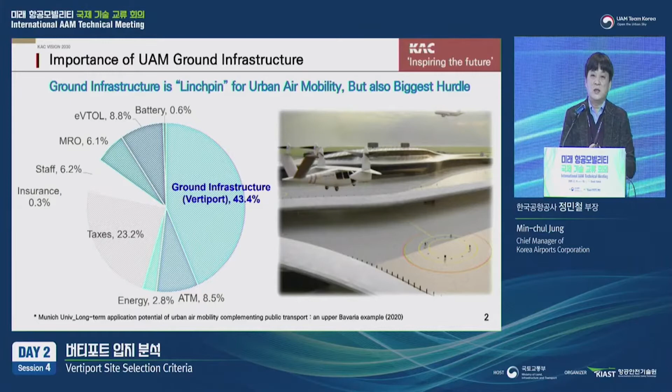This is called UAM. We believe it will be challenging to build UAM vertiports in highly populated regions. There are many factors that need to be taken into consideration, such as accessibility, obstacles, land, public acceptance, and energy.

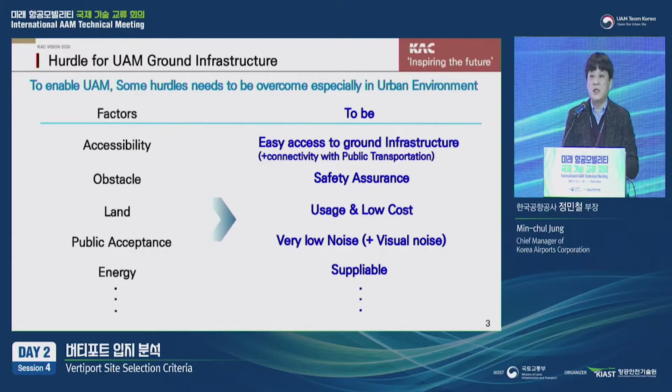As you know, we also need to consider noise factors, as well as charging facilities, because we need to have super fast charging facilities.

So where should we build these vertiports? Overseas, there are Joby Aviation and other UAM leaders. They are better positioned to build vertiports because they have large land compared to Korea.

Compared to those countries which have large land, Korea's situation is a little bit different. We face a lot more challenges to build vertiports because we are a small country with high density of population.

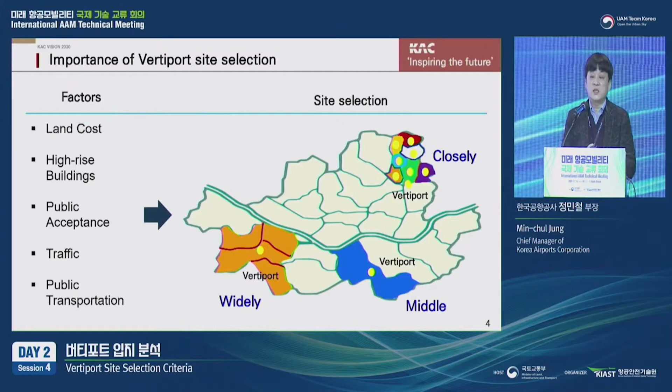A vertiport is not like a bus. There are three different ways to build vertiports. First is to build vertiports in closely related regions, such as building bus or taxi stops. Second, we can build it in more mid-sized regions. Third, we can build it in more wide areas. As I've said, we need to take many factors into consideration before building a vertiport, including land costs, high-rise buildings, public acceptance, traffic, and public transportation.

Let's see the phases for vertiport site selection. The first phase is to determine UAM demand in cities. Then we can identify the required number of UAMs in the city.

There will be some demand. Some passengers who used to use existing transportation modes would convert to UAM when it is popularized in the future. So there will be some passengers who would convert to use UAM.

According to our research, people say that they will be willing to take UAM from Seoul to Jamsil for a cost of 50,000 won. About 5% of the people said so.

So we need to calculate this. We did a calculation taking these kinds of things into consideration with a 5 to 7% conversion rate. So this is what we will do for phase 1. And the next phase is phase 2, where we need to select the UAM service area, which is a wider area.

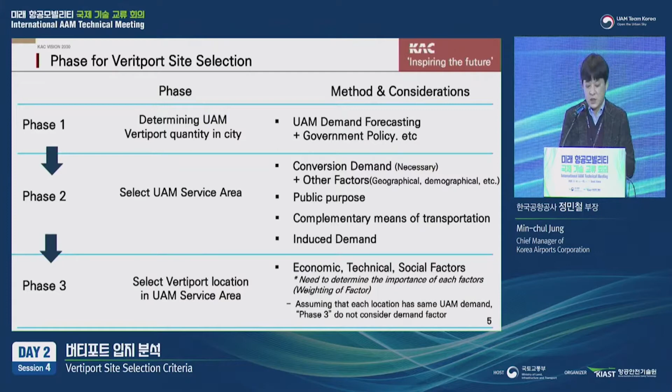And the next step would be phase 3. In phase 3, we will select vertiport locations within the UAM service areas. There will be economic, technical, and social factors that we need to take into consideration, and we need to weigh these different factors to select the most optimal site for a vertiport.

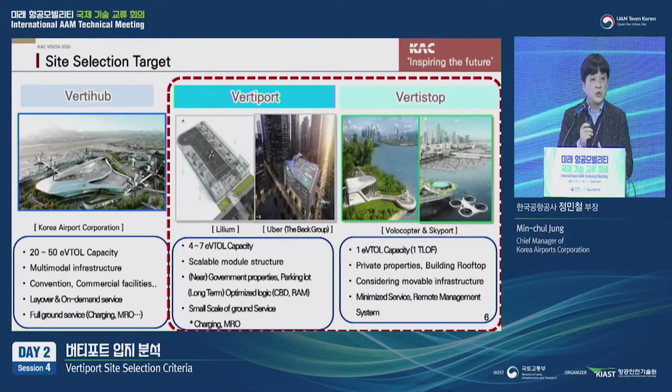Vertiports can be large, medium, or small size. But building a large vertiport would be really challenging because it would require MRO services. It needs to be a hub, so it would be difficult for us to build such a large-scale verti-hub in the metropolitan region or at the center of the city. So we expect that we could build these large-scale verti-hubs at the suburbs, and within the cities we will be able to build smaller-sized vertiports.

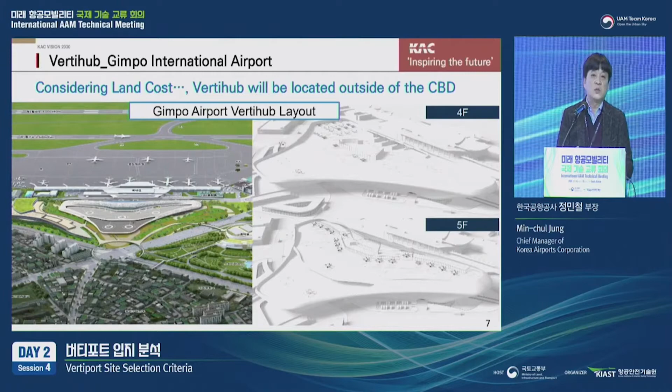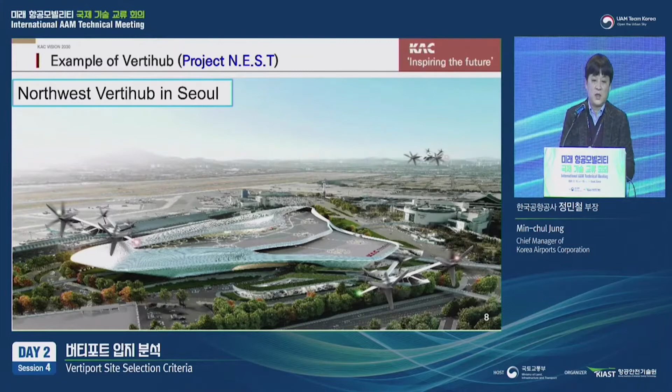So we plan to utilize the existing Gimpo Airport to build a large-scale verti-hub. You can watch the footage on the NEST project, or you can also search verti-hub or Northwest verti-hub in Seoul on YouTube. So this is what we will do in phase 1 to determine the demand for UAM in the city.

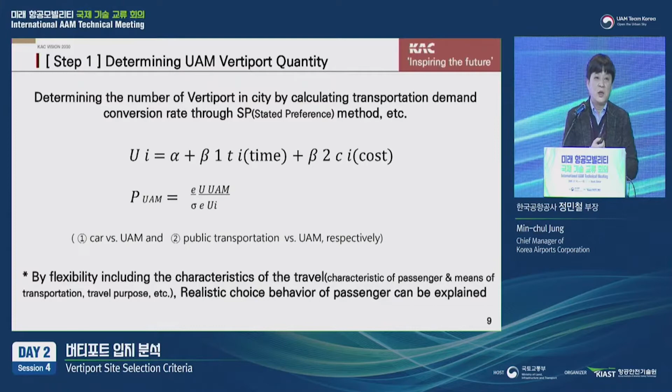This is the formula that we use to calculate the conversion rate. If we were to conduct a survey, we could derive the demand for UAM for people at the time being, but it is better that we advance and further develop these kinds of models to better forecast future demand for UAM among the people.

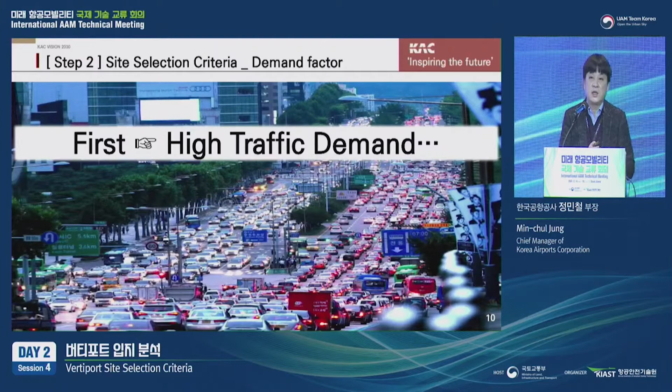Let's move on to step 2. After determining the UAM demand, we need to select the site. We need to locate this vertiport in a place with high demand. So where would be the places with high demand for UAM? It would be the areas with high traffic demand or highly congested regions.

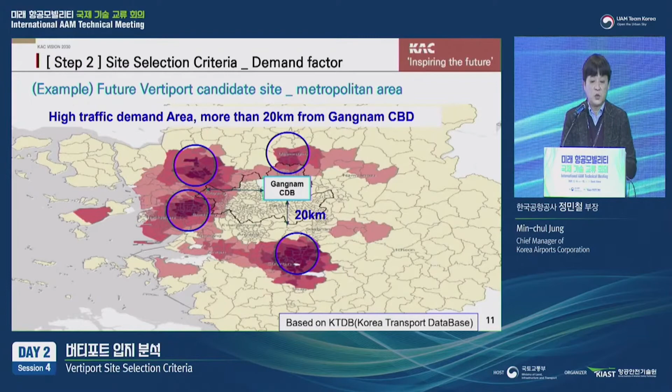According to the Korea Transport Database, these are the heat map data based on the KTDB. On the far left, we have Gimpo Airport and Incheon. On the upper side, we have Uijeongbu. And on the southern side, we have Suwon, Dongtan, Hwaseong, and Yongin. These are some of the potential places for vertiports.

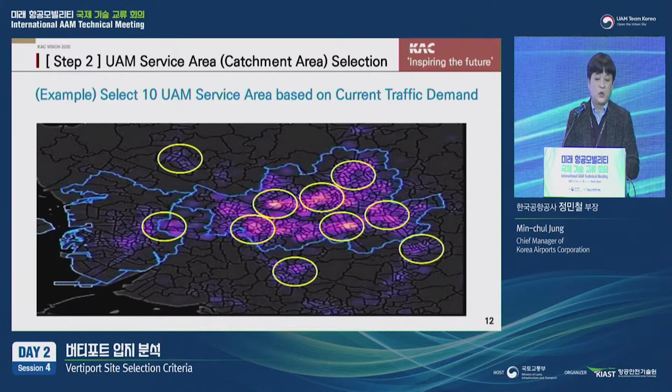So this is an example. Let's say that we need to build 10 UAM vertiports in Seoul. Using this heat map, we can locate the candidate sites for the UAM service area.

People need to access vertiports within 10 minutes or so, which is about a 4 kilometer radius. As for the service area, we believe it should cover about 4 kilometers in radius. So in Gangnam, we can create a circle with a 4 kilometer radius for the service region, which covers COEX, GBC, Seoul Medical Center, Jamsil Stadium, and Tancheon Public Parking Lot.

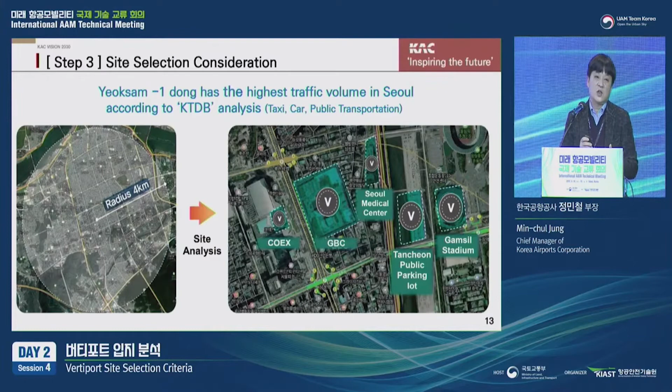Using the criteria that we have, we can evaluate and select which would be best among these 5 candidate sites.

As I've said, we need to take into consideration economic, technical, and social factors in the process. As for economic factors, we need to consider land cost, accessibility, and rental fee. As for social factors, there's noise and visual effects, and law and policy. As for technical factors, the ease of construction, energy, and safety. Some of the technical factors in phase 3 should be weighed based on criteria.

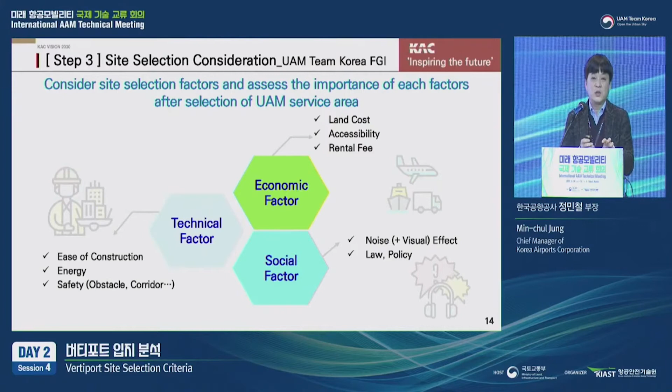So we need our potential site to meet all the requirements based on these 3 factors. So this is our plan. In this plan, there will be hub and ports.

So based on conversion rate, by 2030 in Seoul, we believe 160 vehicles will fly over the sky in Seoul.

So at night, we need to build a storage or maintenance facility for these vehicles, when they don't fly the skies at night. To build that kind of facility, we need about 300,000 square meters of area.

And it will be difficult for us to build that kind of warehouse within Seoul metropolitan region. So it would be better for us to build those kind of warehouse facilities in the suburb.

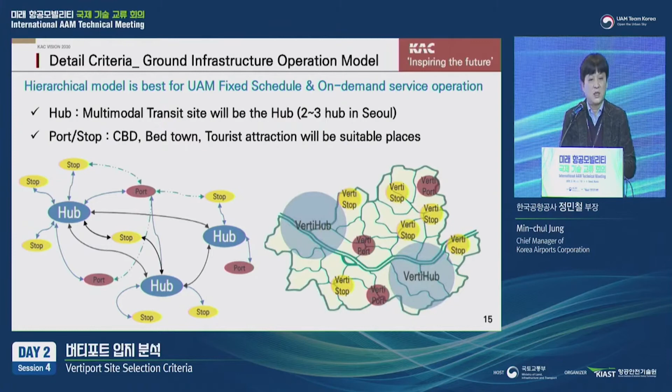So we believe the best model would be hub and spoke model in the metropolitan region. And we believe at least one hub would be needed in small to medium-sized cities.

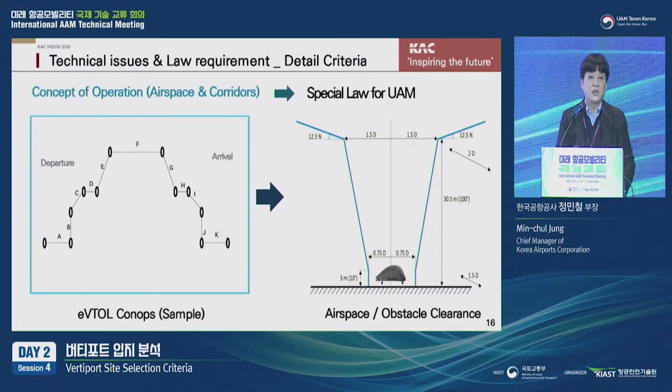And as I've said, time factor is of utmost importance. That is why supercharging is needed. We believe that about 1 megawatt would be needed to charge one vehicle.

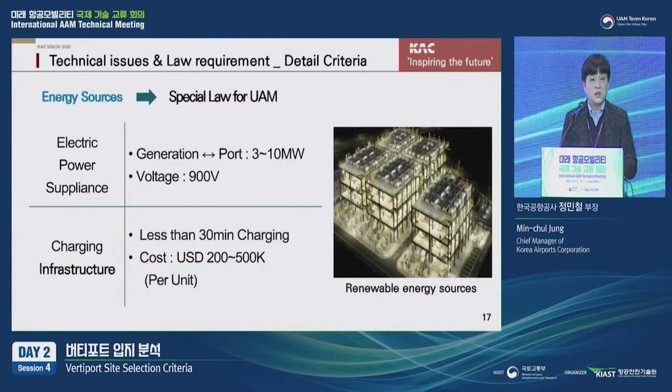And if suppose that we build this kind of vertiport on the rooftop, and without expanding the capacity for electricity for that existing building, there might be blackouts in the nearby area for that building or in the nearby region. So we need to think about the capacity of the electricity for that as well.

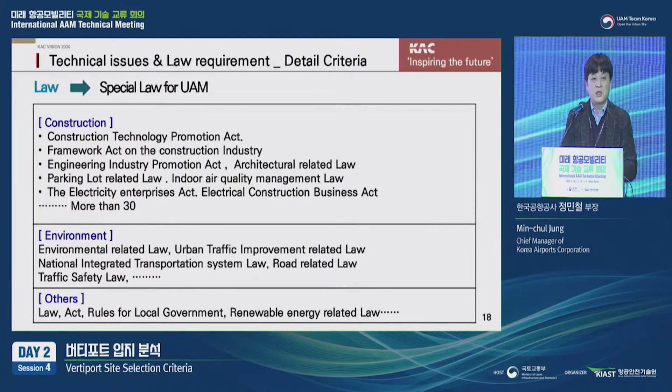And we also need to take into consideration of the law. As you can see, there are various kinds of laws that we need to take into consideration.

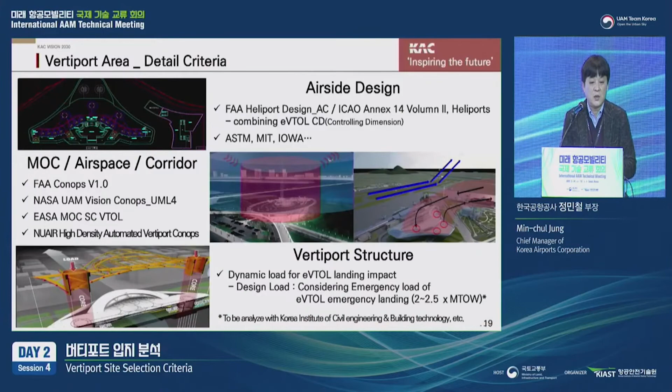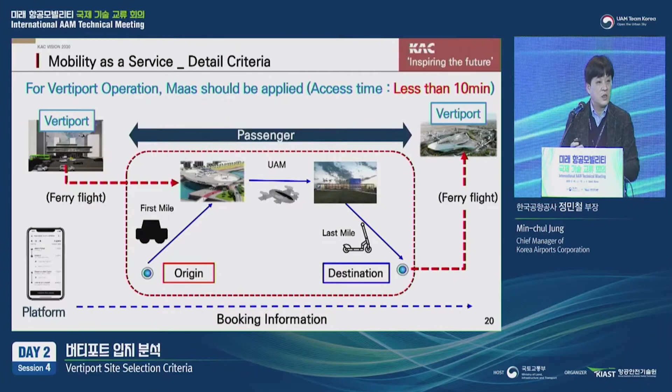And there's airside design. So for this, we need to make sure that we provide sufficient airspace to avoid collision in the sky. And to transfer from one vertiport to another vertiport, we need to ensure the fastest transportation and operation.

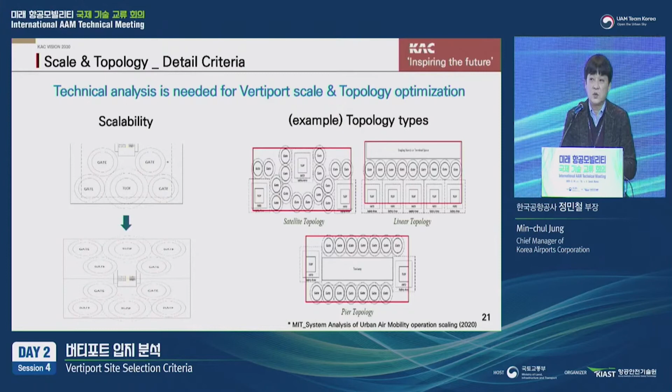And we also need to consider topology and scale. To build the most effective vertiports, we also need to take into consideration of the scalability of such facility.

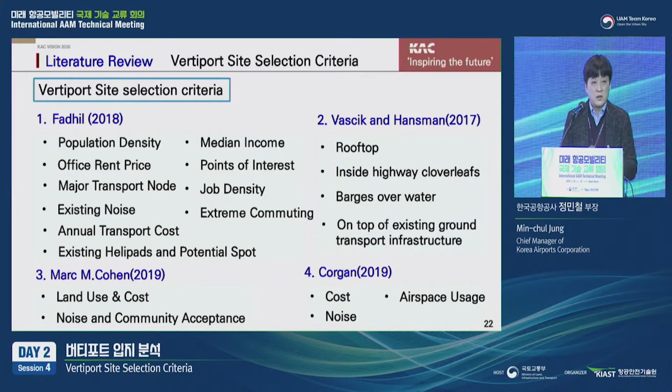And there are many literatures, but unfortunately, there are not many criteria that we found in the literature about this vertiport site selection. So these are some of the few examples which describe vertiport site selection criteria in a few literature.

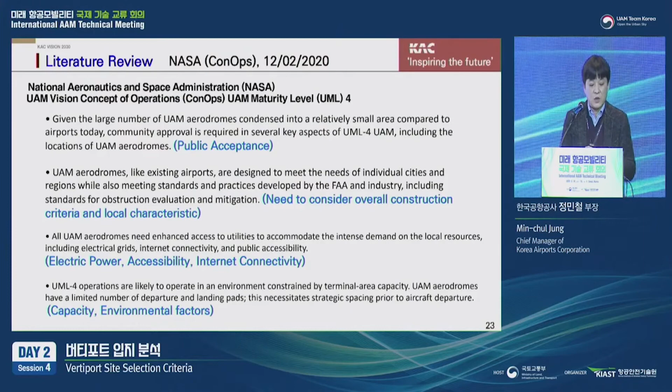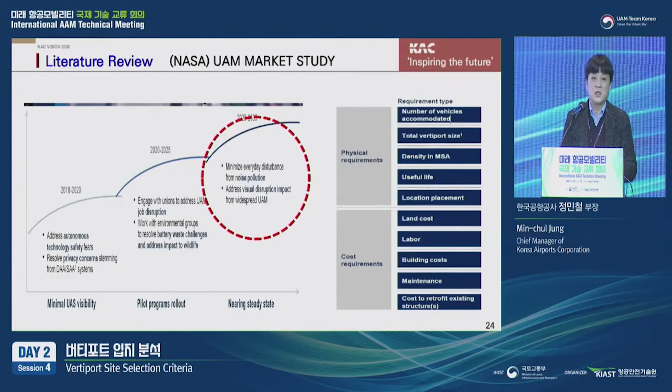And according to the NASA's UAM Vision Concept of Operations UAM maturity level, it features some kind of explanations, and it also says that it is important to consider the noise level when building the vertiports.

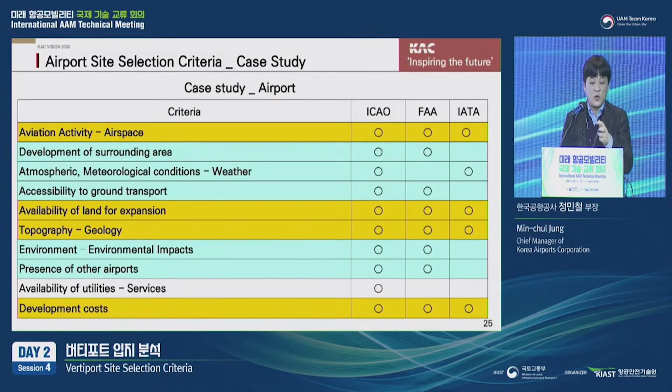And the site selection criteria are pretty similar to the criteria for existing airports, and FAA and ICAO do have these kind of criteria, and those in yellow are the common criteria.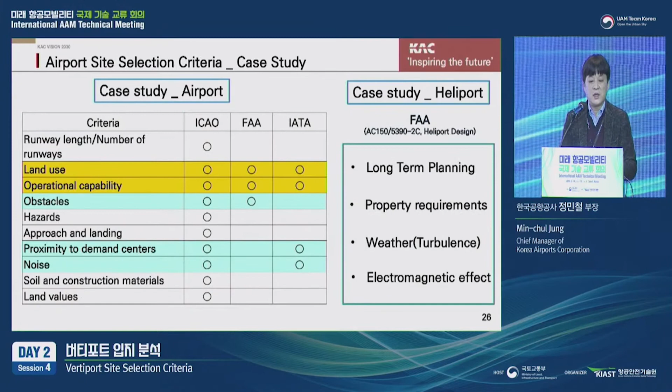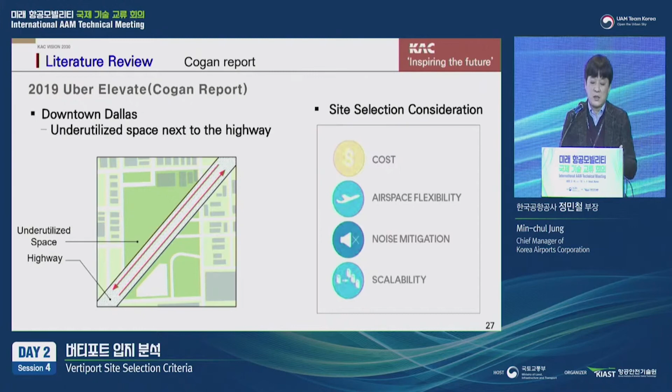And these are some of the criteria provided by FAA. We also need to consider all these factors. And according to the Cogan report, we need to think about land cost, the airspace flexibility, noise mitigation, and scalability.

So we need to think about all these kind of factors in these 3 stages.

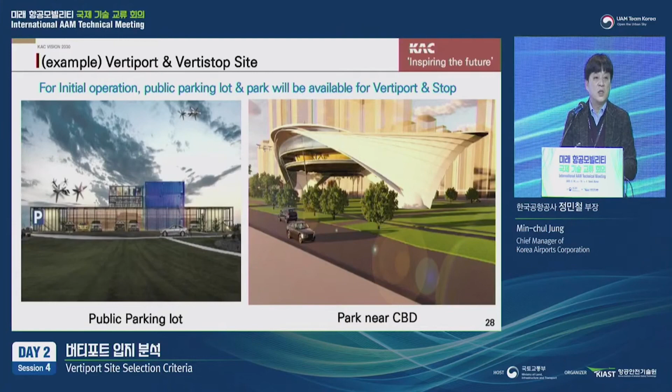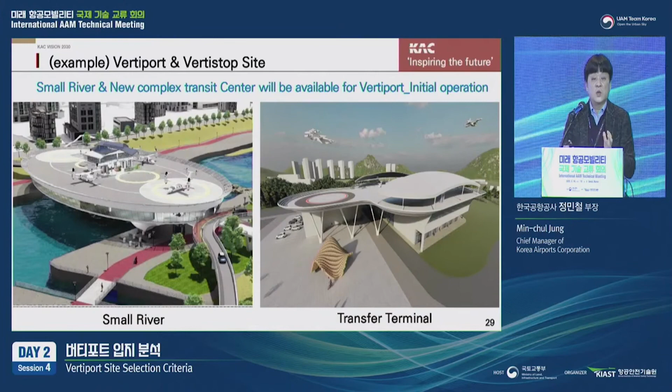When providing and building vertiports in areas with high demand, we can utilize open spaces such as public parking lots or parks near CBD. And we can also receive support from the government with less restrictions for these open areas. Later, we might be able to build these kind of vertiports across small rivers or in new places, or we can also utilize existing gas stations.

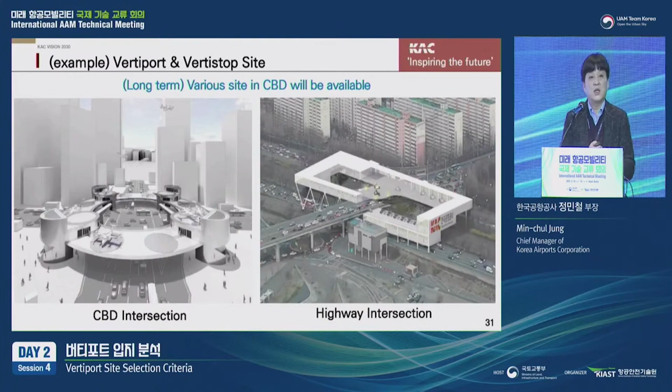And I have also mentioned some of the important factors that we need to take into consideration while selecting such sites.

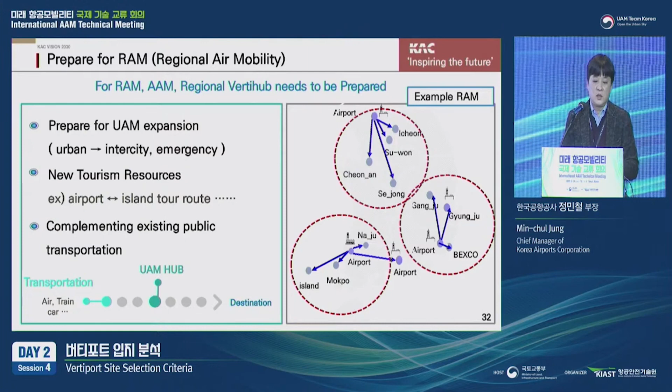So the vertiports for the UAM, should we scale this UAM, and will these UAM vertiports be different from the existing airports? We need to think about all these factors and criteria.